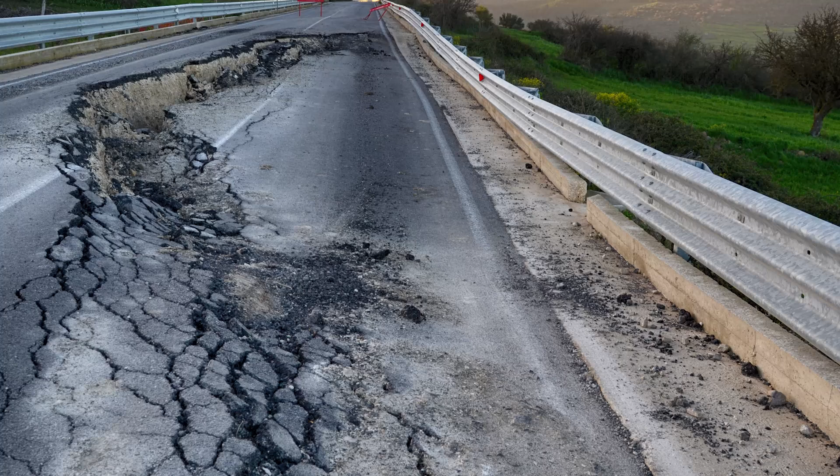Standard penetration soil testing. The stability of every structure depends on the ground it was built upon. There are many examples of projects which disregarded the surface they were built upon, some with disastrous consequences. That is why geotechnical investigations are so important.

If the site conditions are not properly characterized, the resulting foundation will not be properly designed for the site. Investing in the proper investigation up front saves a great deal of time and money down the road in project delays and cost overruns. In this context, the words of Professor Stuart Littlejohn in 1991 ring true today: you pay for a site investigation whether you have one or not.

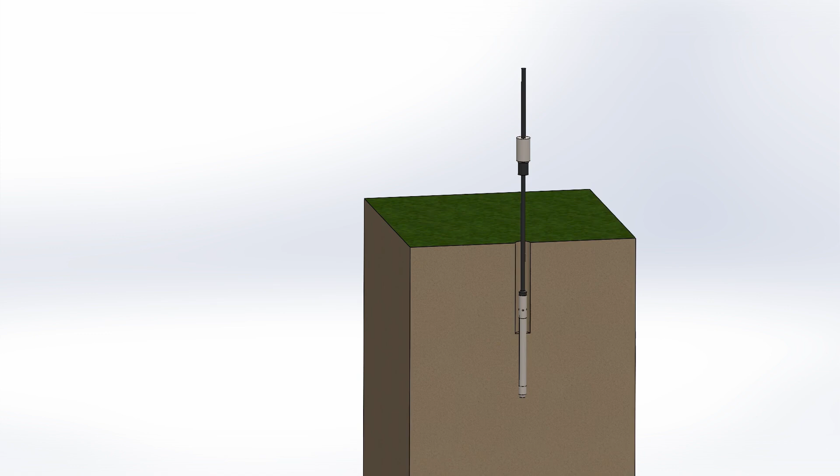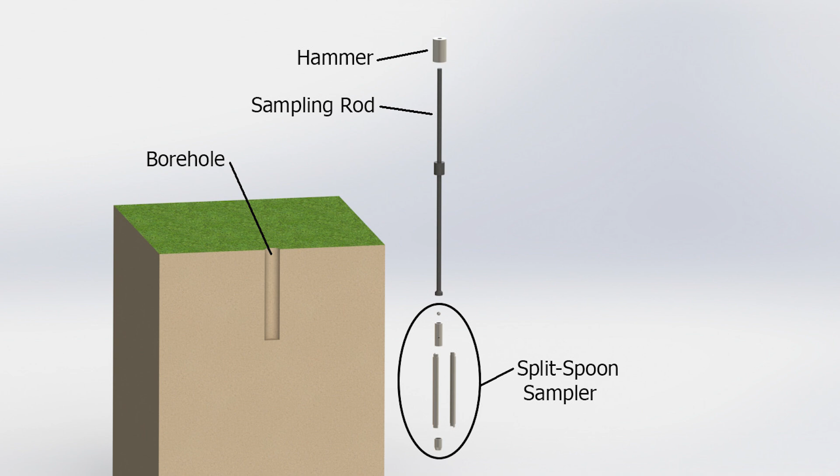One of the ways soil is characterized is by the method of standard penetration testing. It was developed in the United States in the 1920s and involves hammering a split-spoon sampler into the ground using a standardized driving sequence. The test is widely used and is a relatively simple and cost-effective method of estimating shear strength, bearing capacity, and compressibility of soils.

Soil sampling is an important part of the standard penetration test. This is accomplished using a split-spoon sampler at the end of the sampling rod. A split-spoon sampler is typically a 24-inch long, 2-inch diameter hollow tube that is split longitudinally.

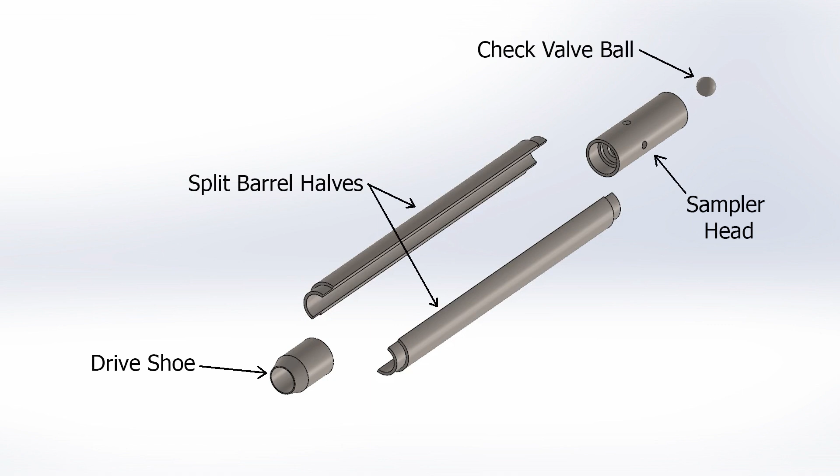As the sampler is hammered into the ground, it gets filled with a disturbed soil sample from the depth of the sampler. When the sampler is withdrawn, the technician splits the casing into two halves, visually inspects the soil, and may touch the soil and rub a sample between the fingers to assess the soil fineness.

The technician then places the soil sample in an airtight bag to be sent to a laboratory for analysis. Analyses such as density, grain size, and moisture content are used to characterize the soil.

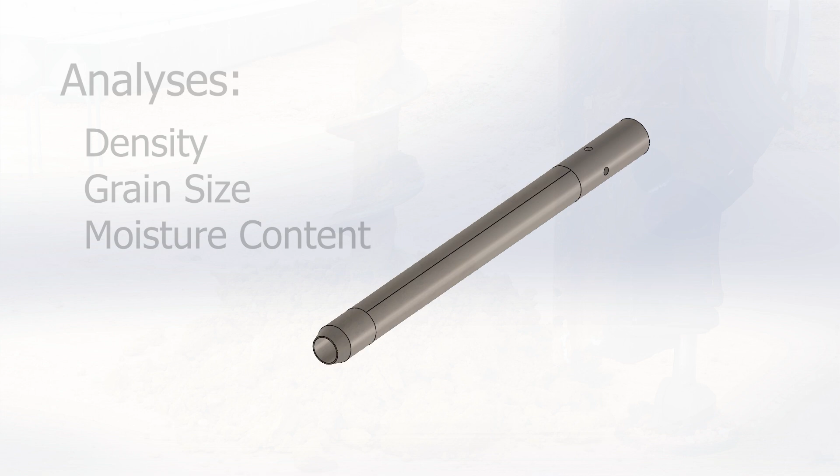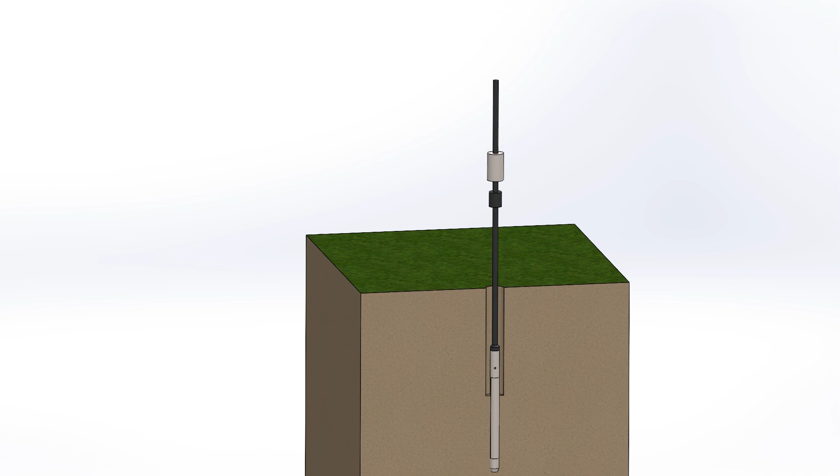To perform the standard penetration test, a borehole is drilled to predetermined depths. At each depth, the split-spoon sampler is lowered into the hole and driven into the ground with a series of hammer blows. For each blow, the standard weight of the hammer, 140 pounds, is dropped 30 inches.

The test counts the number of hammer blows it takes to advance the sampler 6 inches in 3 successive intervals. The first 6-inch interval is called seating the drive and is not factored into the calculations. The final 2 intervals determine the standard penetration resistance, or N value.

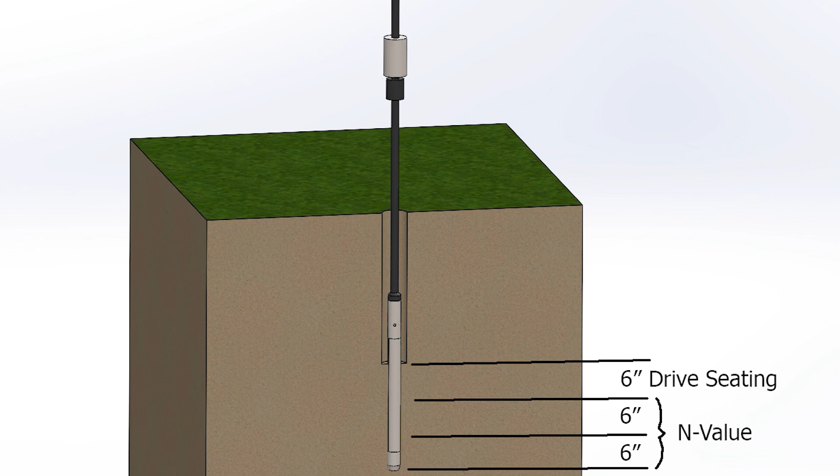If it takes more than 50 blows to advance the drive through the 12 inches, the test is discontinued and drilling to the next predetermined depth is resumed. If drilling is no longer possible, drilling refusal is said to have been reached. The engineer will then have to decide whether to stop the drilling operation or switch to bedrock coring.

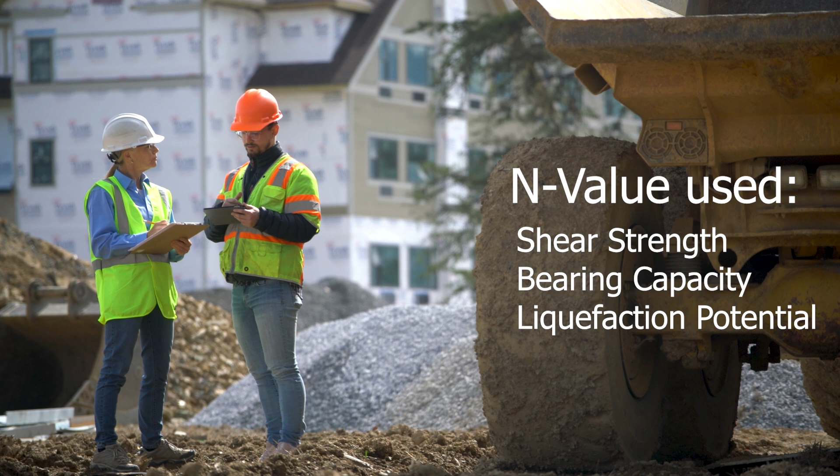Geotechnical engineers use the N value, in conjunction with other soil data, to estimate soil shear strength, bearing capacity, and potential for liquefaction. A higher N value signifies a denser and stronger soil, requiring more blows to penetrate.

The standard penetration test is a valuable tool in geotechnical engineering for assessing soil properties. The laboratory analyses conducted on the soil samples are used along with the N value to provide a more complete picture of the soil characteristics for the purpose of designing safe and enduring structures.